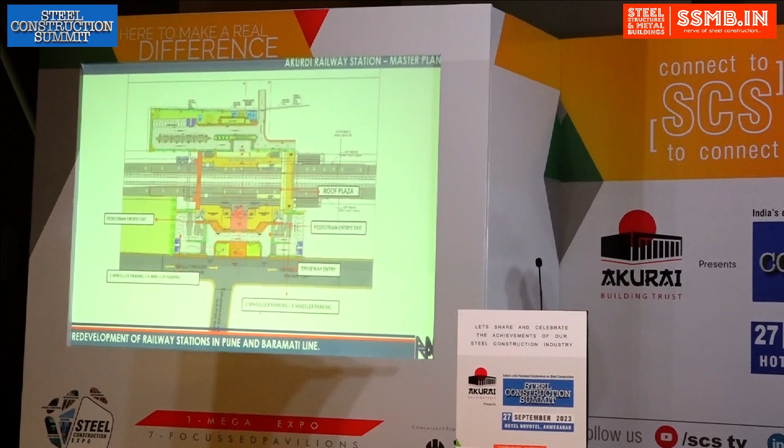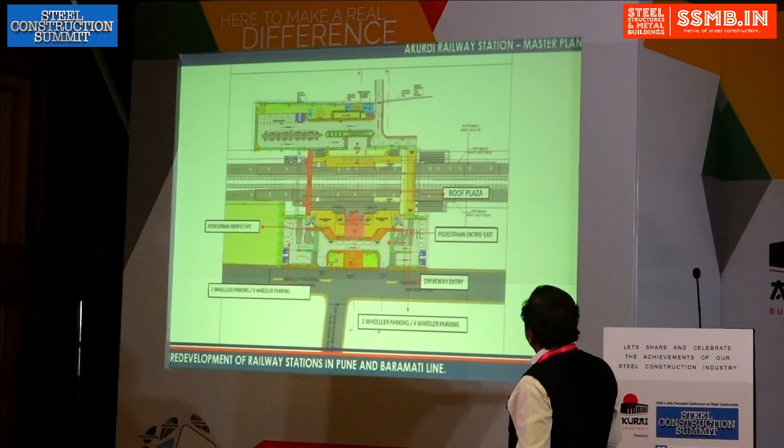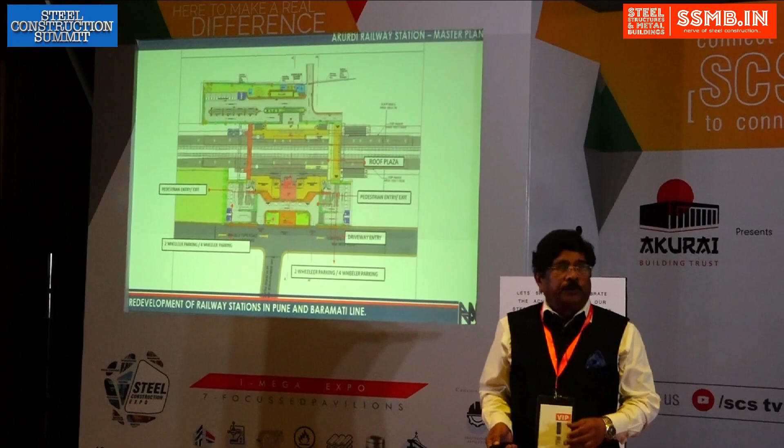What we are really trying to do is add on certain beauties in terms of proper pedestrian movement. On the other side of the station also we are trying to develop it for the people who come down from there - currently there is no such thing happening. So we are trying to add those things so that the station really serves from both ends with equal benefits. And then we are trying to actually build a roof plaza, which is a new concept that we are trying to introduce to most of the railway stations in India.

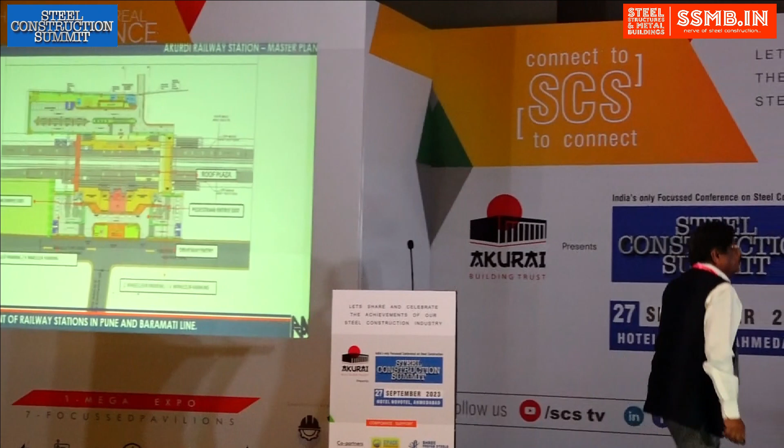Because we are supposed to be working on Chhapra railway station, which is in Lalu Yadav's area, and we are doing some 4 railway stations in Nagpur as well.

So this is a kind of redevelopment and realignment of services and public spaces that we want, and public wants something new, something different. We are trying to build something that will last more than 40 years.

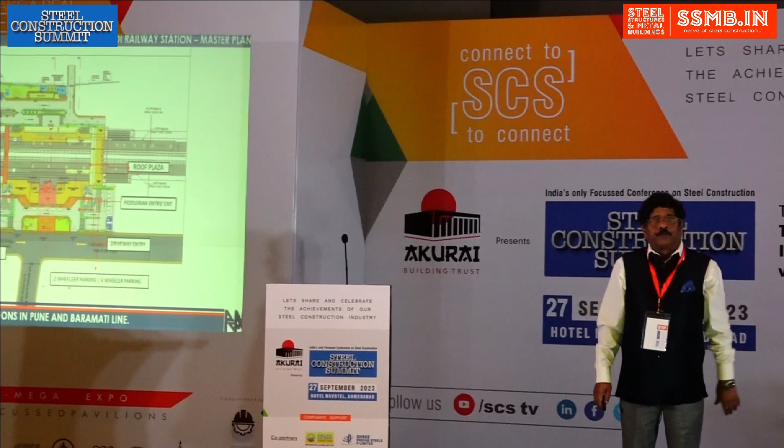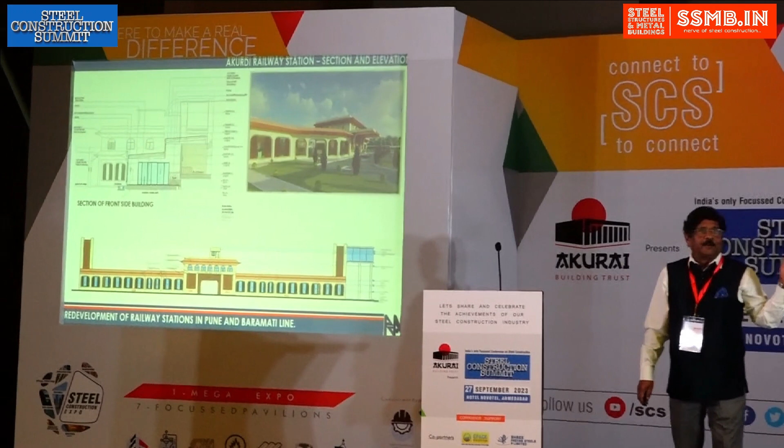And this is a brief of the Akurdi railway station. You have seen how bad it is, how dirty it is, and how beautiful it's going to be. The work has already started.

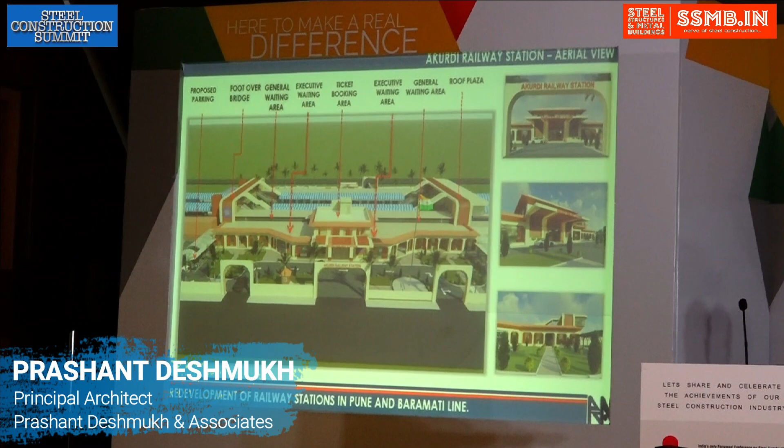That is the overall view. You will see what we are adding - we are streamlining the parking, and we are providing a beautiful foot over bridge.

We have a general waiting area, executive waiting area, ticket booking area, and some of the pictures on the other side of the view.

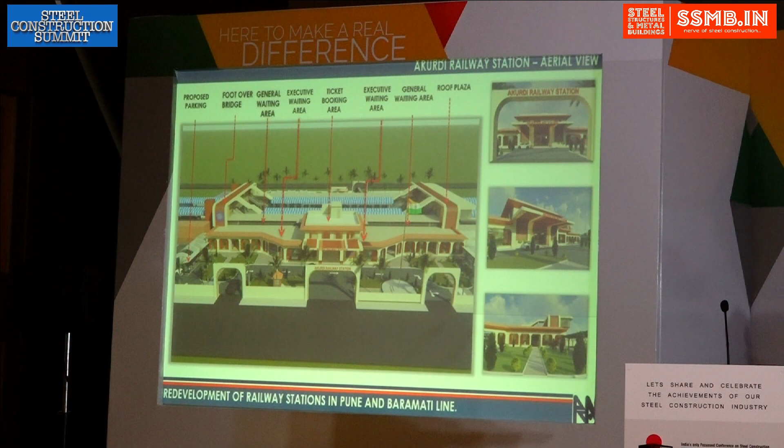And what is more important, I think, is the interiors - the lovely interiors that we are thinking about with all the sustainable materials. Nothing else than pre-engineered buildings to start with, because there cannot be any structure built today without steel.

So we have ACP fascia, solar panels, so that we have a lot of energy around available for us, and turbo ventilators, so that a good ventilation system is maintained. And of course, the advantages are being very cost effective as well as time effective, within the budget of the Gati Shakti or the Amrit Bharat scheme.

That's going to be Baramati. I think you know Baramati is a very special place today, being talked about on TVs every day, and this is how we are going to change it.

What is there in Baramati today is this. You see what Baramati today is. And when I showed this to the leaders of Maharashtra, how we are going to transform this into a beautiful place.

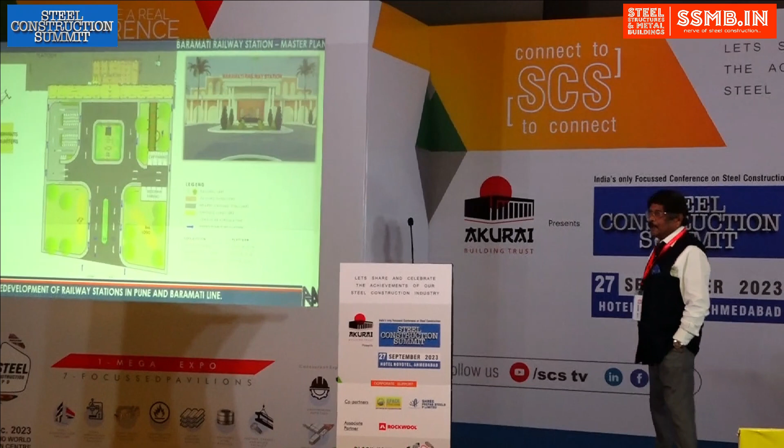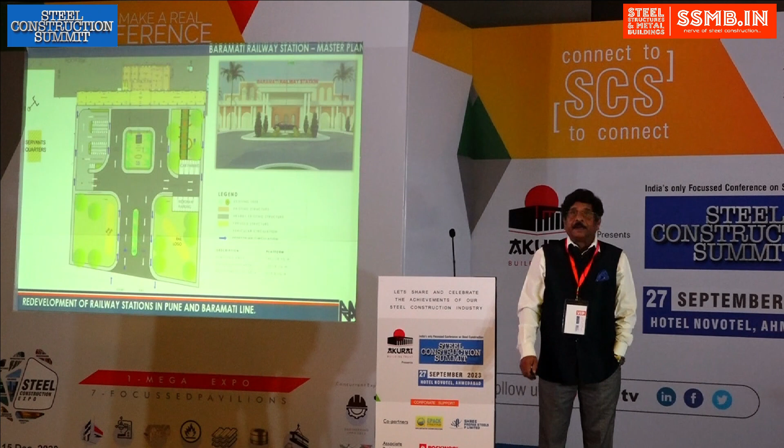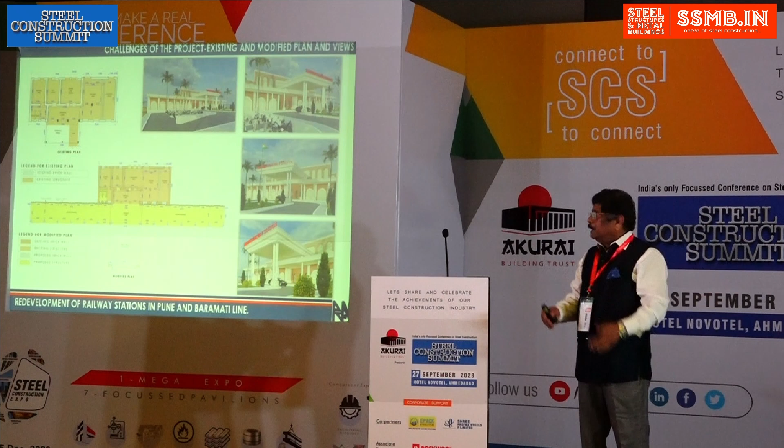They wanted a colonial style of architecture, which we are trying to give them, with some better materials, as well as plans being planned in a very streamlined manner. So these are going to be some of the views of the entire station. We are adding that horizontal belt required for public movement, which will be an additional movement coming up with the new railway tracks being executed there, and there's expected to be a lot of traffic. So we are trying to change it, keeping the main building the same and adding certain structures, all in steel and decorated with different modern materials.

That's a close view. So we are using conventional steel structure here and not a PEB, basically because we have certain constraints as far as that is concerned. All the moldings will be done in glass reinforcement concrete. There will be brick cladding. A combination of old and new structure is done, so we call it a fusion in architecture.

Engraved mural designs will be there. In most of these stations where we have inner walls and inner spaces, we are trying to provide the history of that particular place. It will be done either in murals or paintings, so that every time people visit, you don't have to ask what it is about. They will depict the historical part, maybe in the form of paintings or digital presentation.

That is one of the beautiful stations we are doing, that is at Talegaon. And you will wonder whether it's going to be a railway station in India. This is what it is today. We have all those typical platforms, typical roof structures, a mess of public movement, and so many things, and the foot over bridge, all designed in those British days and still being continued.

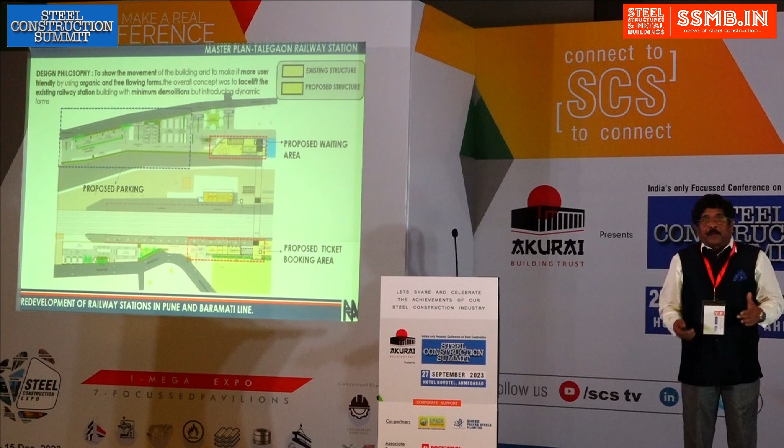So we want to change that, we are trying to streamline that. As you can see, we have a lot of constraints about the space, but within the space we are trying to utilize it. The design philosophy is to show the movement of the building and make it more user-friendly by using organic and free-flowing forms.

So these were some ideas which I had thrown open to the ministry, and of course they could not digest so much of it, so I had to squeeze it down to something that probably happens in this way. With the pre-engineered technology, of course the fascia will be ACP, there will be solar panels for generating energy required for lighting, polycarbonate and turbo combo units, and standing seam roofing.

As I said, the advantages would be cost effectiveness, time saving, versatility, and architectural options which we gave. I think we gave about 3 to 4 options for each railway station to the authorities, and they selected based on aesthetical values, usability, and probably the budget. So that's how it is going to look.

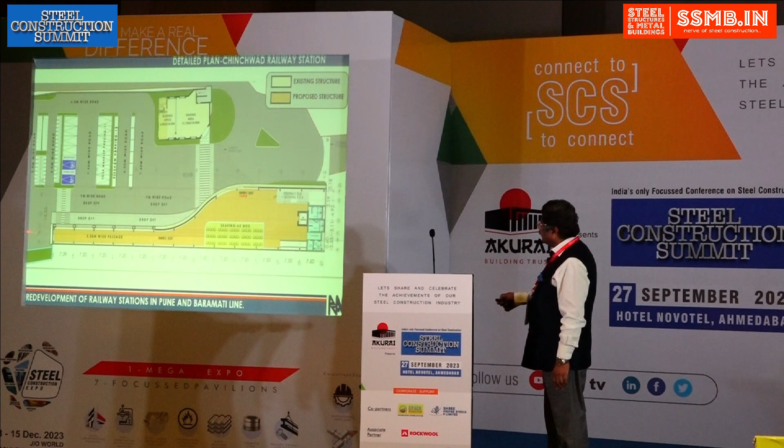So that's a plan where we have a streamlined parking space, and that's an old building that you see here, which we are trying to link up with the pergola. We are trying to facelift this building and add this beautifully planned place. So this work has already started.

Again, pre-engineered buildings, standing seam, powder coated metallic fins, things like that, everything to do with steel, and of course some other metals like the galvalume and the aluminum and all that.